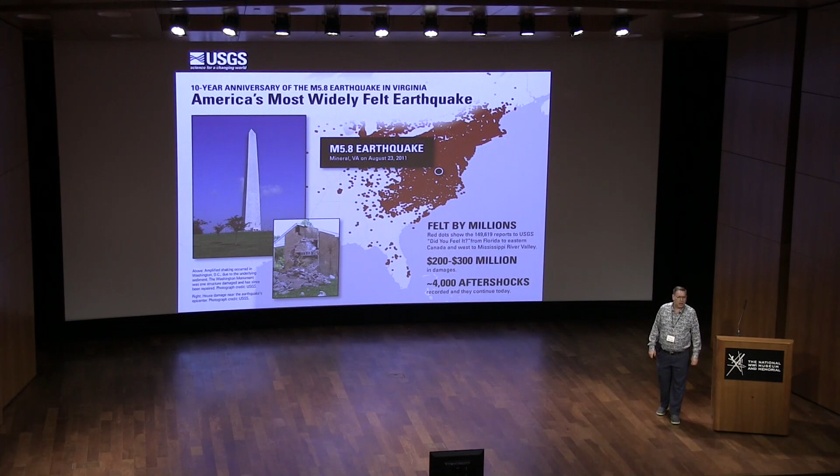So our story begins on August 23rd of 2011, which for the West Coast was a fairly moderate earthquake, but for the East Coast, one of the more significant ones in modern memory occurred, and this was in Central Virginia. The outcome of this was that a lot of masonry and stone-faced buildings in the D.C. area suffered some damage.

So, for instance, the Washington Monument was closed for a period of time, and the National Cathedral suffered some extensive damage.

A lot of the federal buildings and other masonry structures in the area had to undertake an extensive review of their facilities. The Air and Space Museum had known for a while that its exterior facing was not in great shape. So when a thorough review of the structure was undertaken at this time, a lot of problems were revealed. The problems weren't so much from the earthquake, but from the design itself.

Back in about 1975, when the Air and Space Museum was under construction, there was some economic turbulence at that time, so one of the cost-saving measures had been to reduce the thickness of the structural facing of the Tennessee marble on the outside of the museum. They went from 3-inch thick facing down to 1.25-inch facing. This took the lifespan of that facing material from an indefinite period down to 40 years.

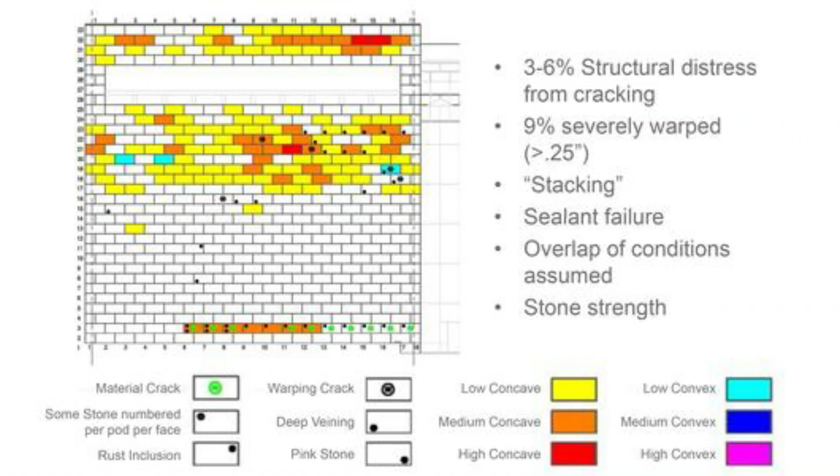And of course, that unfortunately includes the museum's World War I aviation exhibit, A Legend, Memory, and the Great War in the Air, which had opened in 1991. This was closed in 2018.

Work on the new gallery had begun in earnest in 2016. Opening now is targeted for the beginning of July 2025. So we're still a little ways out, but progress has been significant on the new project. The design is essentially at 100% complete now, though there's still quite a lot of work left to do on the path.

Now, when we're considering what the new gallery is doing versus what we've done in the past, it's worth looking back at some of the past iterations of World War I aviation at the National Air and Space Museum.

Really the first exhibition space that we had in earnest for aviation was the so-called tin shed that was erected in 1918 behind the Smithsonian Castle. And if you were to hop in a time machine and see an interesting World War I exhibit, set course for the mid-1920s—there was a lot to see at the time.

Unfortunately, not everything in this space has survived to the present day. Some of you may be aware that the F5L wings are no longer present with the aircraft, nor is the stabilizer or rudder.

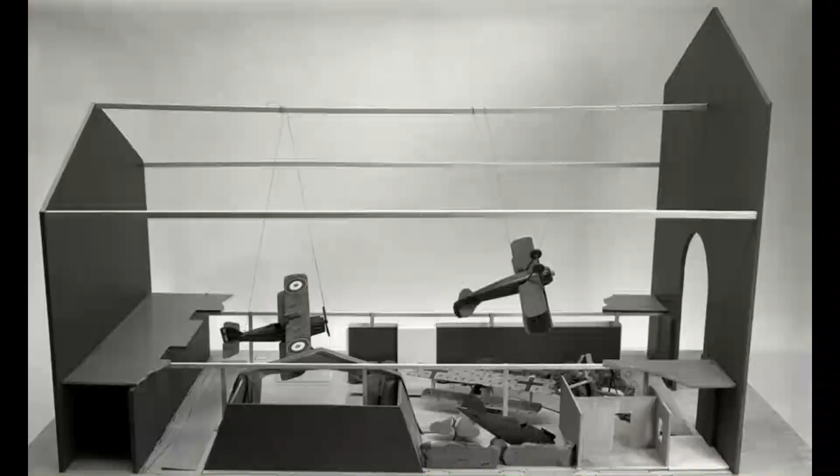It wasn't really until 1971 that a more significant interpretation of World War I aviation was undertaken at the museum. There just simply wasn't space. After the mid-1920s, as other aircraft from the interwar period, World War II, and the Cold War era flooded in, the World War I presence got compressed smaller and smaller within the tin shed space.

But in 1971, when Senator Goldwater was able to push the authorization through for the new National Air and Space Museum on the National Mall, there was awareness that 20 galleries, which is kind of our footprint of exhibition galleries, were going to have to be constructed in the space of just about 4 years.

So there was kind of a panic stampede to figure out how those spaces were going to be filled. So one wing of the Arts and Industry building was essentially given over as a kind of trial presentation space. And World War I was essentially one of the first major trial exhibitions undertaken. The idea was to create something very focused on pursuit aviation, using a lot of theatrical elements to create an immersive space.

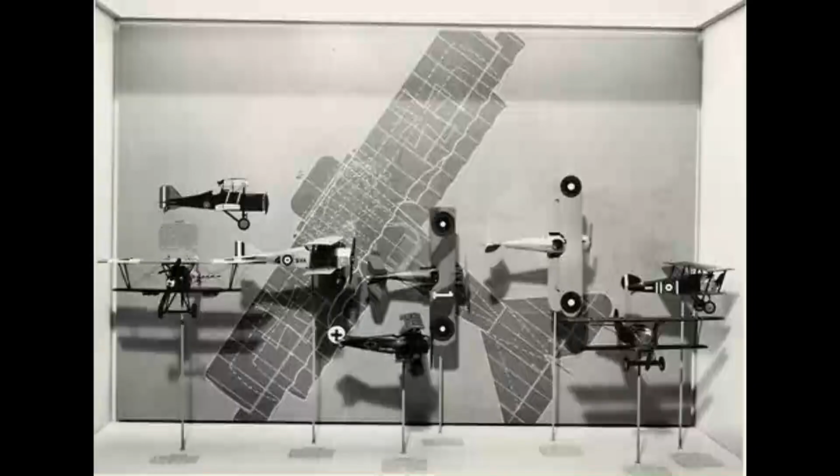So here we see the design from 1971. This exhibit was installed in 1972. You see some fan favorites that were in the gallery, and a lot of the specialized treatments that were put in place. But not a lot of interpretation, though.

But keep in mind, in 1971 we're only 53 years after the end of the war. There were a lot of World War I aviators still around, a lot of visitors with lived memories of that period of time, and certainly a lot of World War I aviation permeated popular culture. So really the exhibit was serving as a touchstone and a commemoration more so than an overtly interpretive space.

So that exhibition was essentially repurposed in 1976 when the National Mall building opened. One of the featured aircraft was actually a loan - this was Dolph Overton's SPAD 7. And if you're not familiar with Overton, Google him, he's got a fascinating story, it's quite remarkable. This SPAD 7, by the way, is the one that's at the San Diego Air and Space Museum today.

Again, you can kind of see the immersive environment - I believe this came in a bit later in the process, the D5A. You can probably get a sense of the problem that emerged with this exhibit: the materiality of the construction. There's a lot of wood and burlap, there's Mitchell's SPAD 16. And what wound up happening is this was a magnet for pests - there were infestations, rodents, insects. Some of the uniforms started to get nibbled on. So this exhibit was not particularly long-lived by museum standards, and it had to be pulled out in 1986 because of these issues.

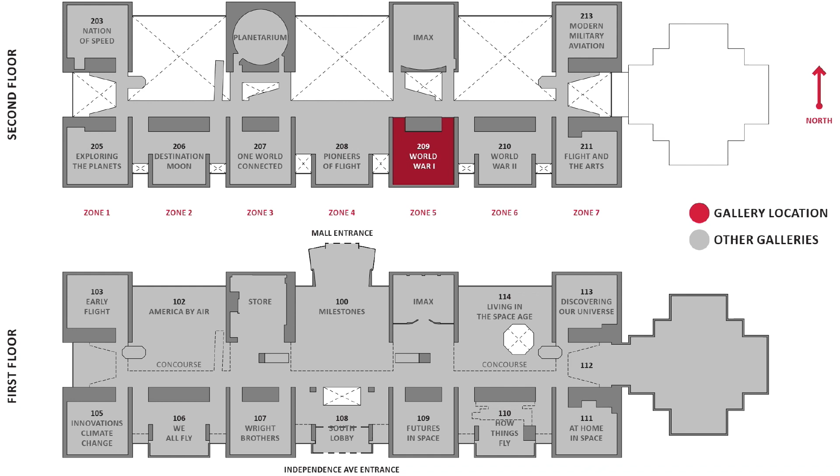So when we were considering the new gallery, these were some of the challenges we were dealing with. In terms of space, unfortunately we're a little bit smaller for the new gallery - if you've been in the museum the last two decades, you're probably familiar with where the Wright brothers space was. That's the new space we're occupying, about 600 square feet smaller than the previous space, about 75 feet on a side, which means we have to be pretty efficient.

And of course, in COVID, and due to closure of much of the museum, we've dropped off significantly. But we can assume that 5.5 million people annually is kind of the standard target for downtown. Not all of those would necessarily go through the World War I exhibit, but let's say a quarter do. So visitation to the gallery on an annual basis is maybe a little over 1 million.

So it's a lot of people coming through, and it's hard to think of another venue on World War I aviation that's likely to have as much throughput. So it's a significant burden and obligation that we've got to try and make this work.

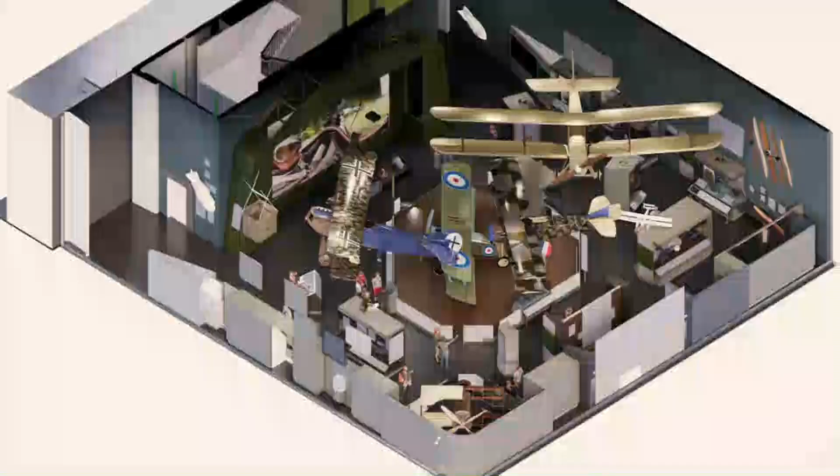So in terms of design, I mentioned that we're a fairly small space overall, and so we've got to do a lot of work. We've got to be very efficient. This past March, I was out at the Museum of Flight going through their World War I exhibit, and I'd say in terms of our scope and tone, we're actually quite similar to what they've done.

They do have the benefit of being about four or five times larger in square footage. So we're trying to do a lot of what they do — imagine what's at Museum of Flight getting compressed down into a considerably smaller space. So we have to be a bit more clever in terms of how we use our various techniques for outreach: digital media, mechanical interactives, graphics, and other elements to try to capture visitors' attention.

Typically in our museum, we have our shorthand for how we describe visitor interaction with exhibits. We've got streakers, strollers, and scholars. Streakers are the tourists on the death march along the museums on the National Mall. They don't care what they see, they just want to say they've seen something — so they might take a selfie in front of something, post it, and then they're gone.

Dwell time often less than two minutes. They're literally dashing through spaces. It's been a hot day, they've got the screaming kids, they don't really care. They're not there to be educated, they just want to say they've seen something. They're in and out. Unfortunately, there are a fair number of our visitors that fall into that.

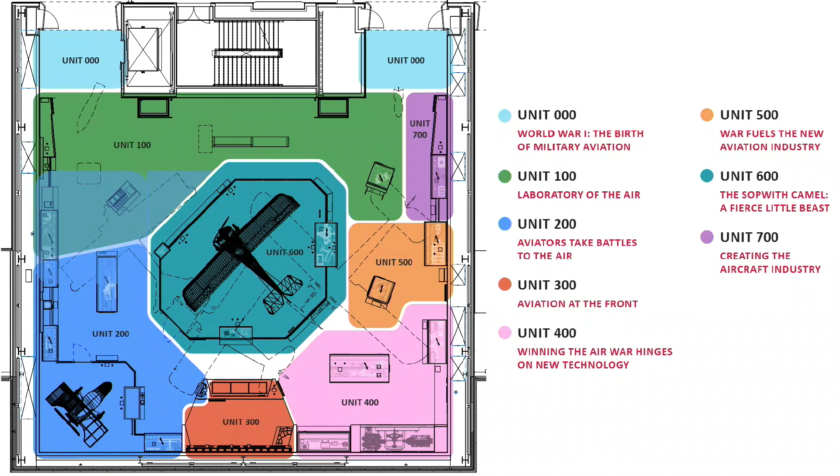Unit 500 is our manufacturing industry section, using Dayton Wright DH4 serial number 1 basically as the case study. We've also got the very first Liberty engine in the collection, and we highlight that as part of that manufacturing story. Our Camel is there essentially to be a case study for operations, as well as technology and people stories related to it.

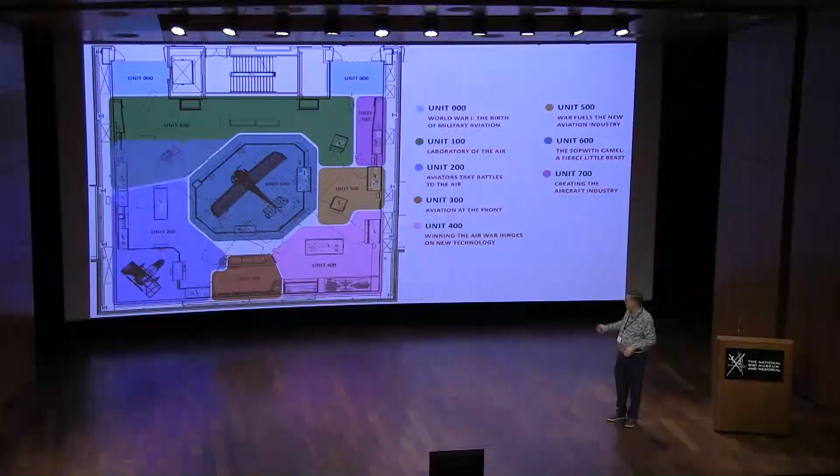So the entire area around the Camel is intended to be a focused study on who used the Camel, how it was used, and a little bit about the technologies employed on it.

And lastly, our Unit 700 is meant to be an entry into the post-war era. What is the legacy of World War I aviation? Everything from air power advocacy to the foundations of civil aviation.

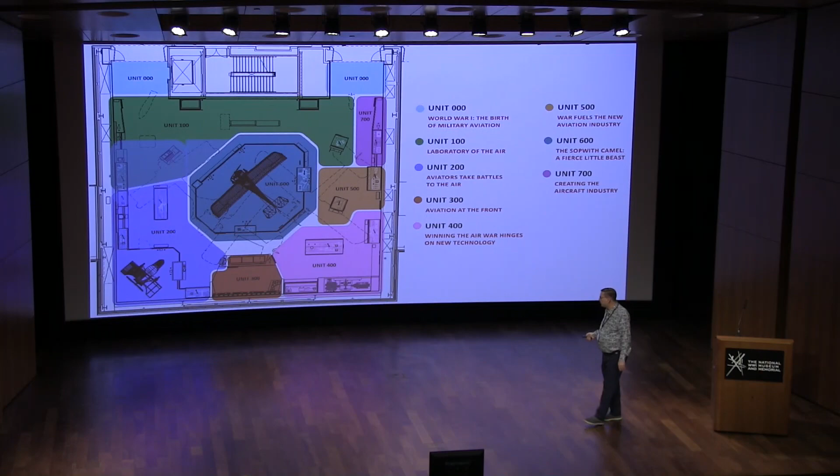In fact, one of my most challenging jobs is to integrate the 3D physical design with the graphic development, because they're different contractors. Our project is so big we can't have a single contractor do everything. So we've got one large design firm doing the graphics, one large design firm doing the 3D design, and unfortunately I essentially have to be the referee that integrates those two things, making sure those elements come together in a coherent way.

So making sure that the right label and the right visual, the right graphic, goes in the right spot. It's a big challenge, but anyway, accept it for what it is. It's an incomplete view of the space. It'll give you some sense though of the volumetric aspects of how it's going together.

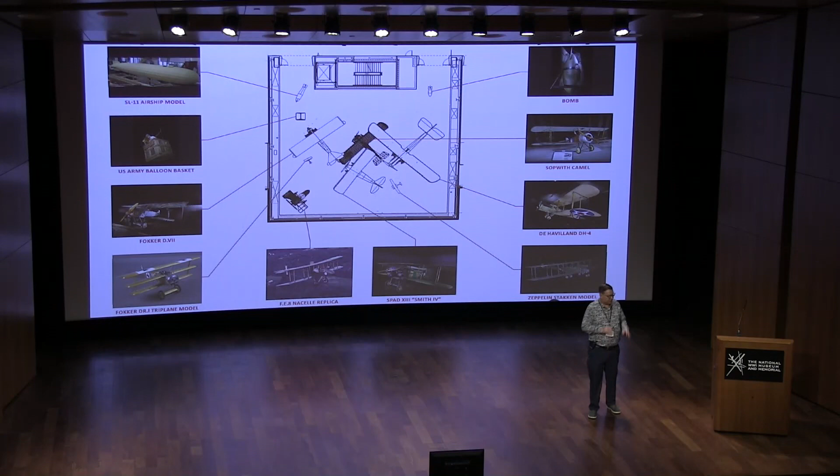Artifacts, of course, are the bread and butter of the National Air and Space Museum. We pride ourselves on the ability to conserve artifacts for an indefinite period, or at least as long as possible. So that's really the heart and soul of what we're trying to put on display, and I can only give you just a small taster of what we're trying to do.

These are some of the larger artifacts. We are getting a 1/48 scale SL-11 fabricated.

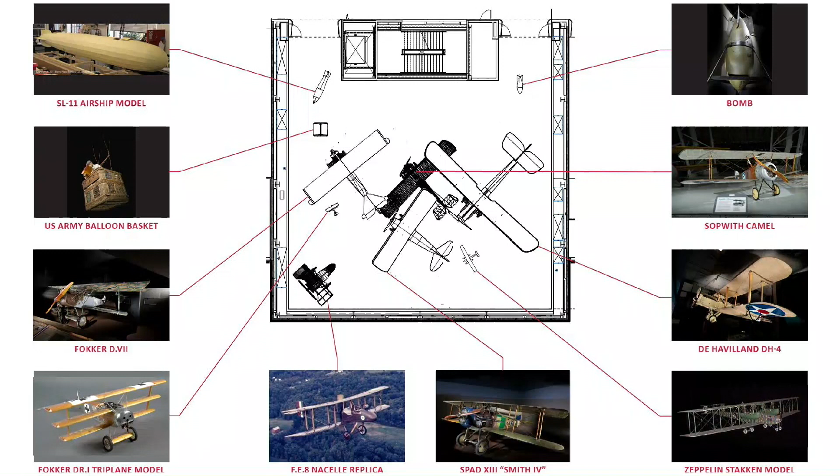We were trying to use the Imperial War Museum's one that they had done a few years ago as a model, and actually we were just looking at that and finding out there might be a few issues with theirs that we're trying to improve on. So it's an interesting process. We learn a lot.

There are 20 display cases in the gallery, a lot of which are fairly significant size, so it's a lot of artifact display for a fairly small area. We are displaying more artifacts than we did in the last gallery, even though it's a slightly smaller space. So some of our highlight artifacts do not fit in the gallery, but that is not necessarily a problem.

For instance, the Voisin that we said was so obstructed in its view before is actually going outside the entrance, outside the west entrance. If you're familiar with the space, it's over the mezzanine, between the gallery and the IMAX theater. The great thing is you'll now have very long vistas all the way down the second floor mezzanine on both sides to see the aircraft, so there's a lot of opportunities for viewing it from different viewpoints. Lighting is going to be a lot better, so I think it's really going to be fantastic.

And then on the other side, we'll have the D5A, so we'll also have some really great opportunities to get fantastic views on those aircraft. Mention some of the other aircraft that we've got, some previous fan favorites - there's Javier Arango's Camel, and we've got Ray Brooks's SPAD 13.

We try and tell a bit more of the Ray Brooks story, so there's a couple different ways that we're trying to do that. One is we're having actors read some of the letters between Brooks and his wife Ruth, or his fiancée Ruth at that time, talking about his famous dogfight on September 14th, where he single-handedly survived an attack by 8 D-7s and brought down 2 of them, but barely survived.

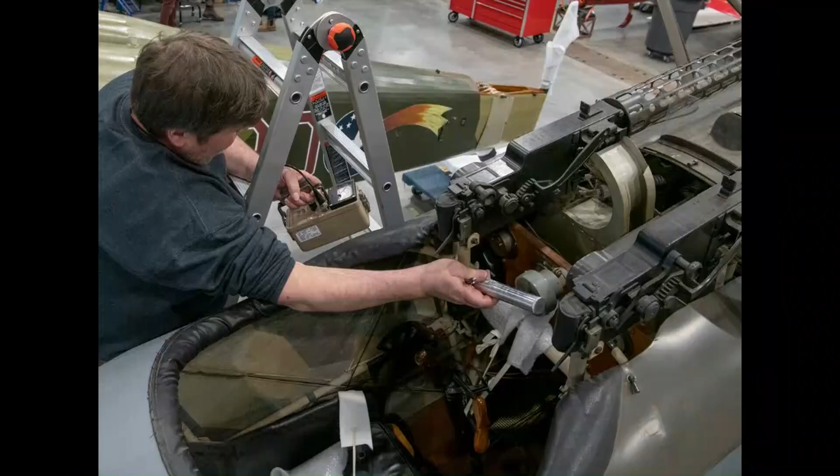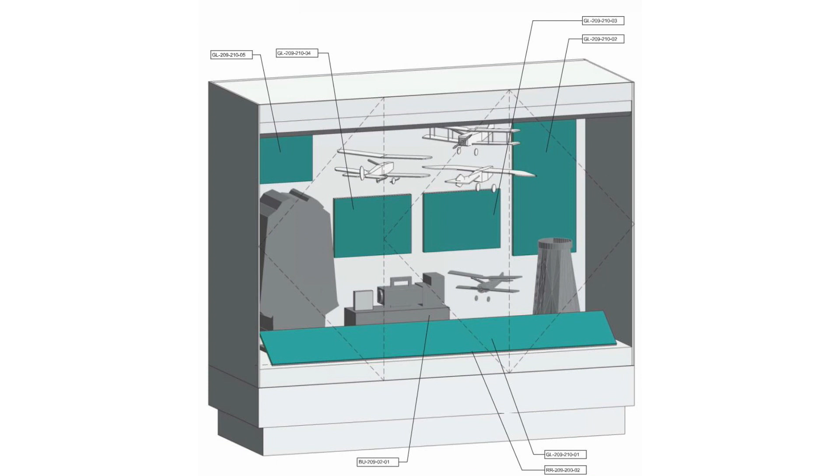This is a case on observation aircraft, a mix of models. We've got a parachute container for an observation balloon basket, we've got a camera, we've got a tunic from somebody from 135th Aero. There's our Chris Moore working on our cutaway D7 model that we've got displayed near the aircraft, so you can actually get a sense of the interior.

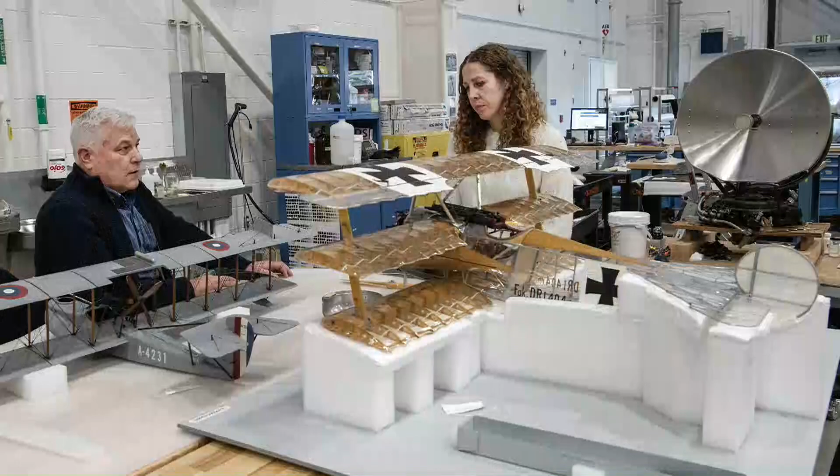Some of the other models that you can see in the exhibit are going through our conservation process. Of course, we've got a lot of armament, some of the radio equipment we've mentioned. One of my favorite artifacts is the Drexler steering gauge, basically the first generation gyro attitude instrument that was used on the Staakens. Camera, propellers, got a carburetor, Billy Mitchell's pennant from the bombing trials after the war. A lot of textile work that's going on.

This is recently we've just finished the uniform display. There's a few famous names in there - we've got Mitchell, Kiffin Rockwell, Eddie Rickenbacker are a few of the folks represented in this display, but you get a sense of some of the uniforms as they're getting prepped. Of course, got a lot of fabric taken off of various aircraft - one of our German balloon crosses you can see being treated at Roundel.

Got some art, period art that are going in there. Mentioned the script - takes up an incredible amount of time. This gives you a sense of this. There's probably about 250 pages long for our script development, but that gives you a sense of what that looks like.

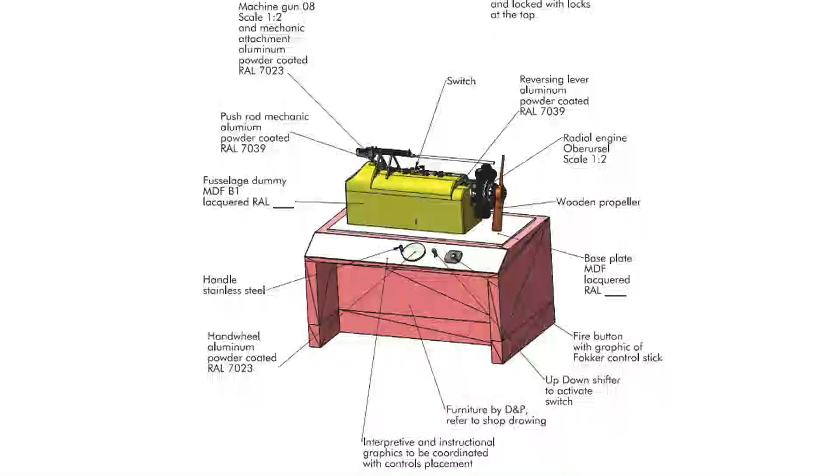Mechanical interactives are a big element for us, and one of the things that we want to do there is give the visitor an opportunity to interact with more complex technologies or something that would be kind of alien to them. Chris has done a lot of work on helping us set up a synchronization representation to show how that works. We've got a camel control stick near the camel - that's really the sounds of the camel, so kids can come in and hear a blip switch or the firing levers.

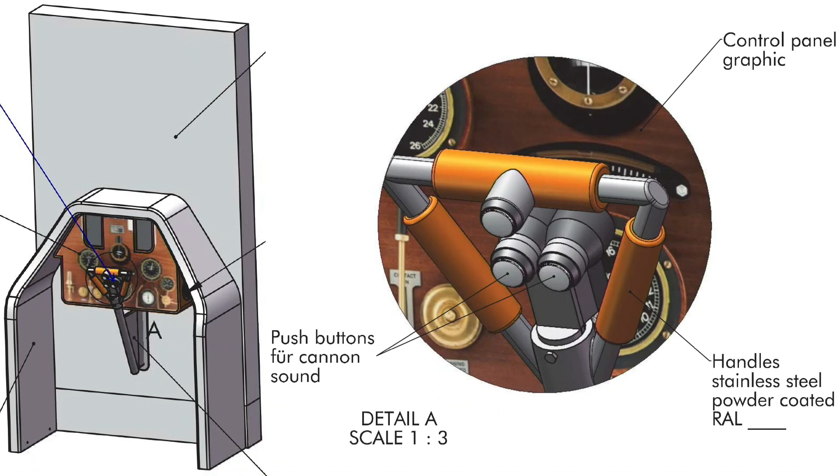Now, one of our challenges is that the most destructive force in the universe is a middle school boy, and we get a lot of those - so your kind of standard is silverback gorilla. So, for instance, on the camel control stick, we dispensed with the actual levers and went with buttons because those will survive those kinds of forces. So whatever we do, we have to make sure it won't get ripped off. Anything that's not in a case, we make sure that we have a 4-foot touch distance so that there's no easy accessibility.

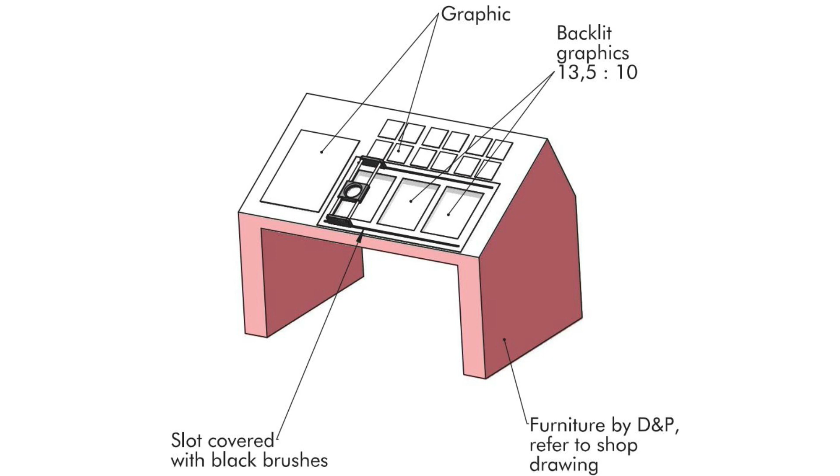For aerial reconnaissance, one of the things we do is a photo interpretation table. We have several backlit, large photographic images, actual images taken from National Archives. We have insets of things visitors are supposed to find, and then they'll take a magnifier and sweep across to find those.

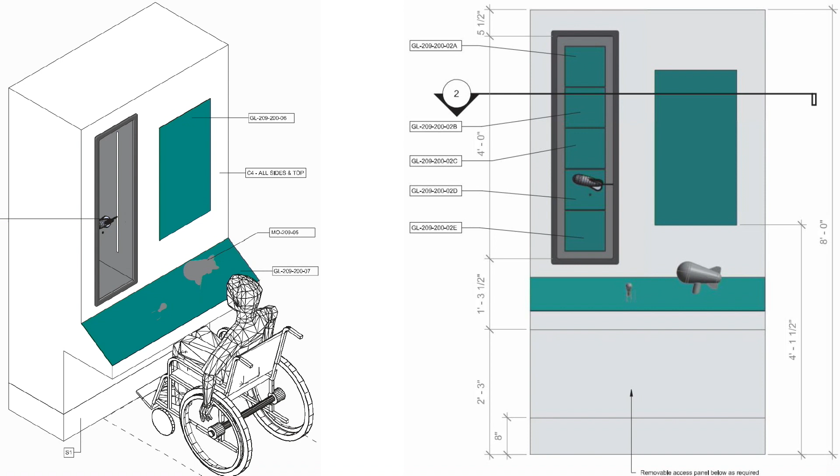We've got another one on observation balloons, where we want to showcase sight lines, between 0 and 500 meters, to give a sense of what sight lines are at different altitudes. This one's been proving a little difficult for me, trying to find actual archival images for all the different altitudes, so if you've got any thoughts on that, let me know. I do have some from 300 meters and 500 meters, but it'd be nice to have a bit more of a mix.

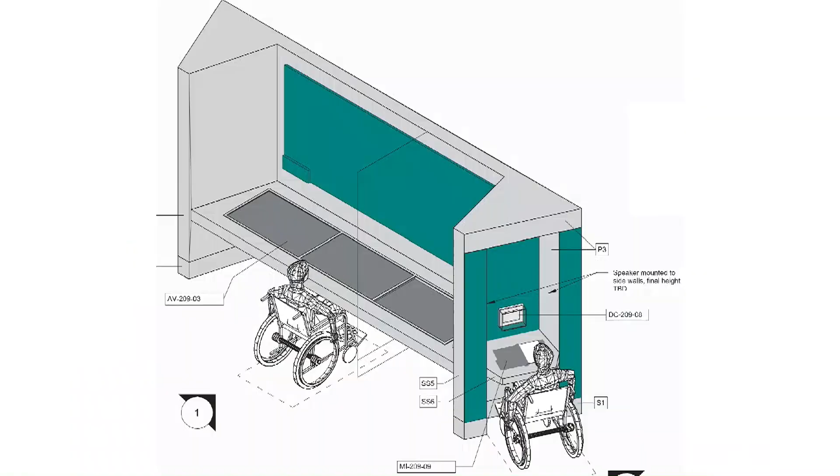Mentioned the big screen up at the front that's going to be flying aircraft from flying collections, particularly Rhinebeck. We're going to start filming in May for that. Here's our trench environment where you look through periscopes, our interactive table, our video screens on both sides of the gallery. This gives you a sense of that space.

We did want to stick at the end a bit of our legacy, some of that popular culture element that was in the previous gallery. This past summer, I had an intern go to the Library of Congress and scan their entire collection of 30s era pulp covers related to World War I aviation. If anybody's interested, let me know, I'm happy to provide all those. They're nice high-res scans, so we've got a nice display of those.